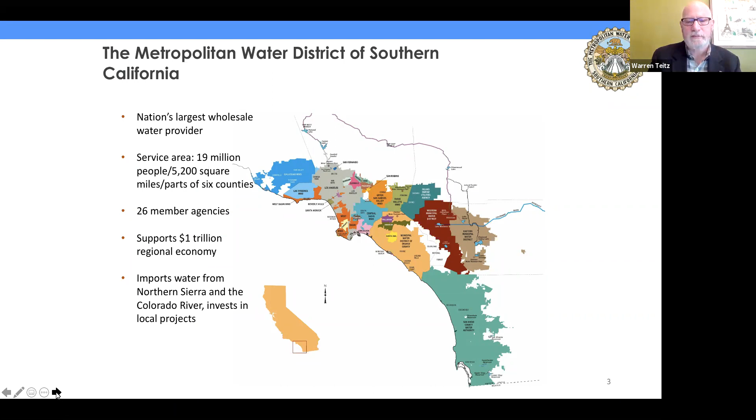So for the past 30 years, we've been diversifying our resource portfolio through investments in conservation, local resources, and storage and exchanges. And we've invested about $1.5 billion in these local supplies. It's part of our One Water approach to building climate resiliency into our reliability in our portfolio. And innovation is a key part of that. That's really the goal of this Future Supply Action Funding Program, to drive innovation with local supplies in partnership with our member agencies.

So we initiated the Future Supply Action Funding Program in our 2010 IRP with the goal of wanting to be able to accelerate these local supplies if we needed them in the future, not just for climate change uncertainty, but for all kinds of uncertainty that our region faces. We wanted to drive innovation and pilot new approaches, and these demonstration studies de-risk new technologies so that we can safely integrate them into our practices. We want to do that by removing technical, institutional, and regulatory barriers.

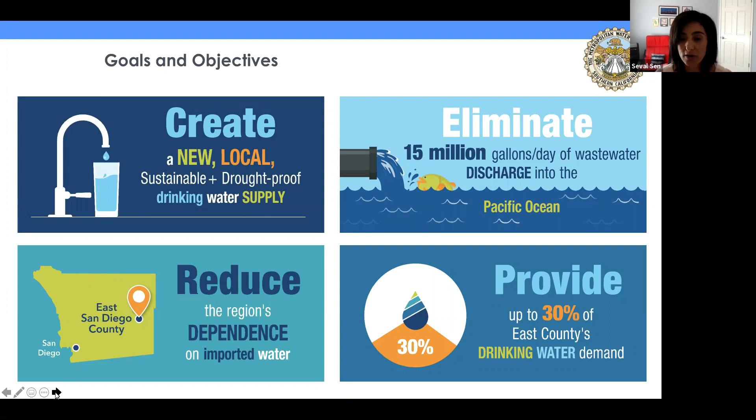A little bit about our goals for the project. Why are we doing this? It's really to create a new local, sustainable, drought-proof drinking water supply in our community. The project size is about 15 million gallons a day of wastewater, eliminating that discharge into the Pacific Ocean, capturing it where it's generated and turning that into a local water supply. It will create up to 30% of our customers' drinking water demand, and in return reduce dependence on imported water. Next slide.

Getting into a little more detail, this is our area in East San Diego County. There's about 15 MGD of wastewater projected to be generated by the online time of this project, and currently we generate about 14 MGD, so we are not far off. But currently we only take 2 MGD of that

wastewater and send it to the Ray Stoyer Water Recycling Facility, owned and operated by Padre Dam, and turn 100% of it to recycled water use, and also supplement and feed the Santee Lakes Recreational Preserve. The remaining flow is discharged to the City of San Diego's collection system and sent to the Pacific Ocean through the Point Loma wastewater treatment plant.

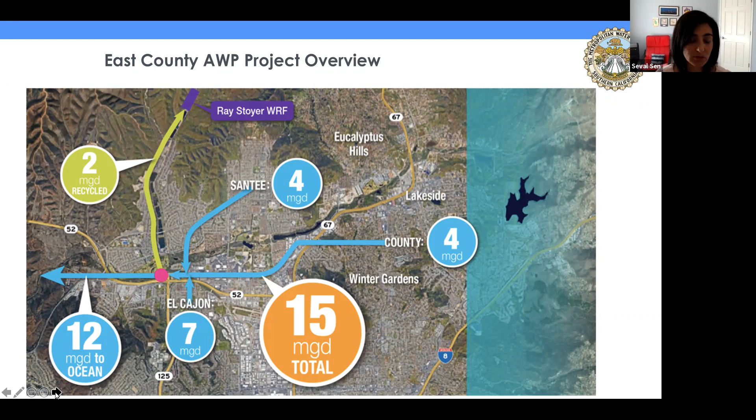Next slide. With the implementation of our project, we are not going to waste that wastewater. We'll capture all of it from all the partnering agencies and direct it to the expanded wastewater treatment plant that we are currently working on, coupled with the advanced water purification facility to produce raw water suitable for discharge into Lake Jennings, the local reservoir, as you can see on this figure. Lake Jennings is owned and operated by Helix Water District, another partner of the project.

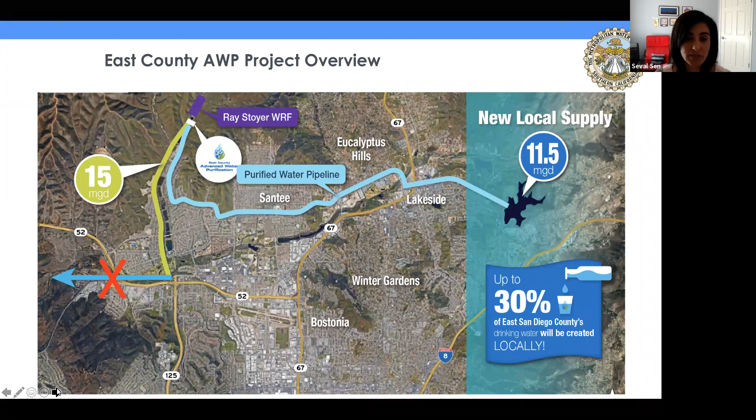This water will once again be treated at their Levy water treatment plant before it's served to the customers. That will generate 30% of our demand, as I said, between the Helix Water District and Padre Dam Municipal Water District service areas. Next slide.

A little bit about the implementation schedule, just to set the stage. This is such a huge project for us, so we broke it into three more manageable packages to address the skill sets of the contractors. Package 1 is everything about treatment: the wastewater treatment plant, a solids handling facility with digesters, and the advanced water purification facility.

Package 2 is the product water pipeline, an 11-mile pipeline taking product water from the wastewater treatment plant to Lake Jennings, and the wastewater conveyance improvements are packaged under package 3. They're being done by different design-builders on board. We are executing this project using a progressive design-build method. We are in the midst of design, going through 60% design right now, and we plan to be online by mid 2025.

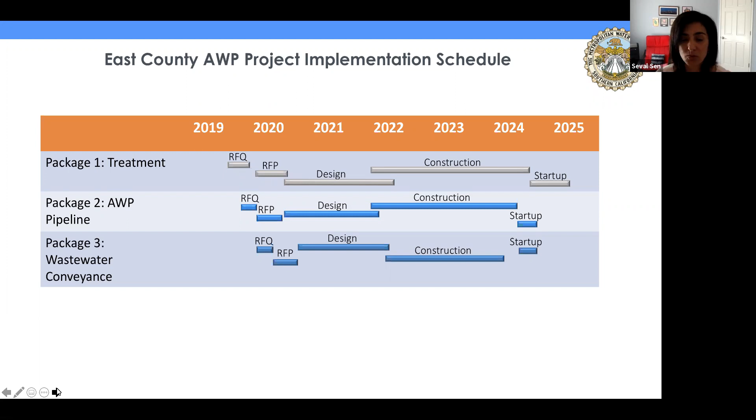And this is where we pilot tested this study as well. And yeah, we also then gained some operator experience on a membrane facility that we never operated before. So Padre Dam operators were taking care of the operation and cleaning everything for this demonstration facility for 6 years. So that was a great benefit.

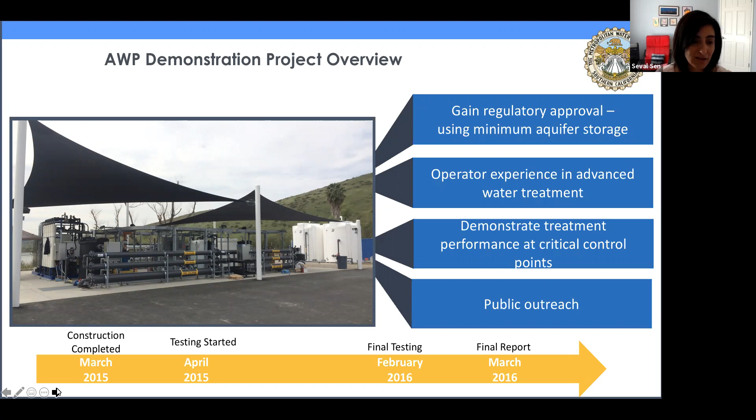And also we used it heavily for public outreach. Hopefully some of you came to the site and visited our demo facility and got one of our tours. So just wanted to mention that and give a visual, because this is where we tested this study. I believe that's my last slide. So I will turn this to Luciana to give us more details about the study that we've done.

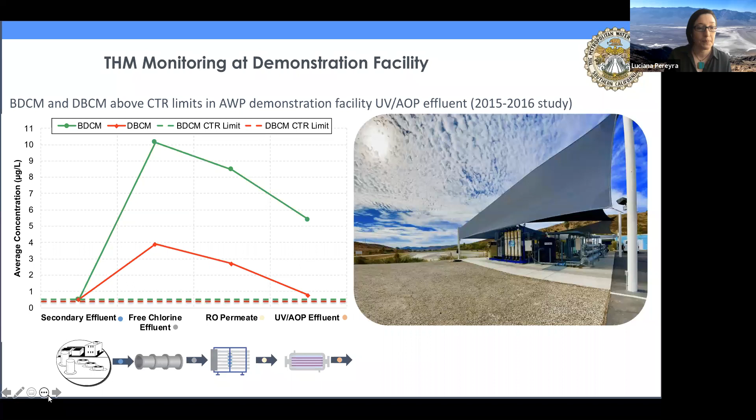So these observations prompted a study, a desktop evaluation of different options to see which one we could use to achieve CTR compliance for these 2 THMs. So these are the 3 options that we looked at. And the first one is the establishment of a mixing zone. So this would be a zone within Lake Jennings, within the reservoir, where the project would receive credit for dilution or for constituent decay, and the CTR limits have to be met within the boundaries of this zone, as opposed to being met in the pipeline right before discharge.

So this is an appealing option because it has no capital or infrastructure investment. But there are several studies that were required for the regulators to consider this option, and it was just not compatible with the timeline of the project, so we didn't select this option.

Another option is the one in the middle, which is air stripping, and this option means that we will separate the THMs because they are volatile, so we can use air stripping towers to do this. This is a proven engineering technology, but it has higher capital and operational costs.

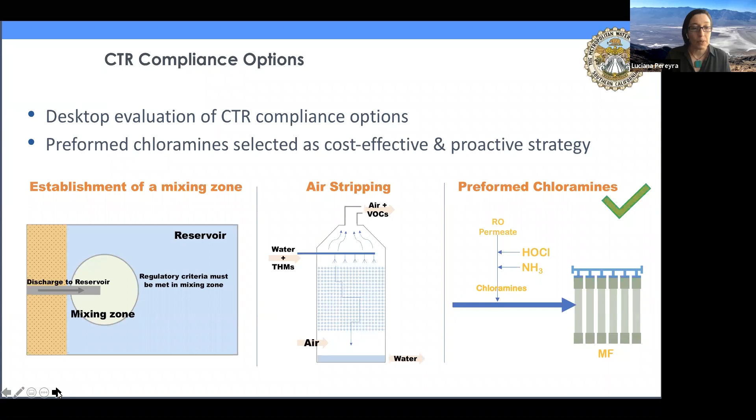So we did not select it. The option that we selected is the one on the right, which is the use of preformed chloramines. And I will tell you more about this because that's the topic of this presentation. But we selected it because it's a cost-effective option and is proactive, meaning that instead of forming these THMs and then finding a technology to remove them, we are implementing a strategy that minimizes or prevents their formation altogether. So I will tell you more about the preformed chloramines.

What we're looking at here is the advanced treatment for the full-scale project. So if we start from the left, and I think, yeah, you can see my pointer. So if we start from the left, we're going to be treating tertiary treated wastewater, and it's going to be treated by membrane filtration, reverse osmosis, ultraviolet advanced oxidation process, or UVAOP. And then this product water is going to be transported to Lake Jennings. And during that transport, we're going to do a free chlorine disinfection.

So if you look at this treatment train, you can see that at different points in the treatment, we add chlorine or HOCl. So if we start at the end of the treatment, we use it for disinfection. In UVAOP, we use it as an oxidant. And here at the front of the treatment, we add it together with ammonia, and that is to form chloramines. And chloramination of the feedwater is a common practice when we have membrane processes, because the goal is to prevent biological growth and biofouling of the membrane processes.

So we could do this, for example, with free chlorine. We're going to prevent biological growth, but free chlorine is a very strong oxidant, so it's going to damage the membranes. So instead of doing that, we form chloramines that are mild oxidants, so they are not as damaging to the membranes, and they can still prevent biological growth. So this form of addition of chlorine and ammonia directly into the feed water is what we call inline chloramination or conventional chloramination, and that's what we did during the demonstration study.

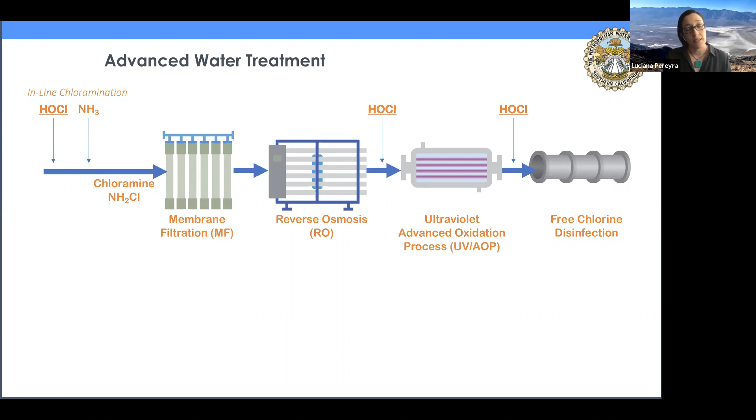So if we could zoom in this part of the process and see what happens with the chemistry, we would see something like this figure in the bottom left. So we have the tertiary treated effluent coming in, and this has some organic and inorganic constituents, and some of them are DBP precursors. So for example, inorganic DBP precursors are bromide, that is involved in the formation of all the brominated THMs and also bromamines. So what happens when we add chlorine, which is a strong oxidant, to this water, is that reactions are going to take place and DBPs will be formed. For example, the 4 THMs that I mentioned before.

We're also adding ammonia to form the chloramines. So we effectively form the chloramines, but with the ammonia now we can form bromamines too, and those could damage the membranes. And once we have chloramines in the water, there are reactions that can take place with chloramines too, and the constituents in the source water, and that could lead to the formation, for example, of NDMA. And NDMA is another chemical that's regulated under CTR. It's a CTR constituent, and it also has a notification level for drinking water. So the idea of using preformed chloramines is that we will prevent these reactions from happening.

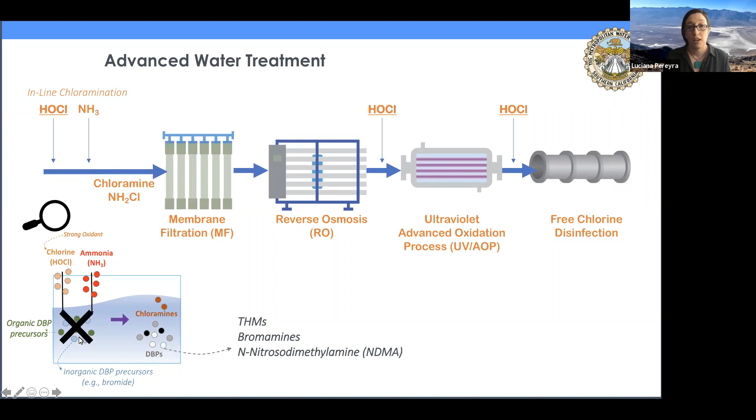And the way to do that is with a simple change in the process, which is shown in this figure on the right. So instead of adding chlorine and ammonia directly to the feed water, which is this thick arrow, we add it to a side stream of water that's very clean. It has very low content of organics and inorganics. So when we mix them, we only form the chloramines and avoid all these other undesired reactions. And one type of clean water that we can use is RO permeate. So this has low capital and O&M costs. There is some additional equipment that's required compared to inline chloramination, but it's minimal.

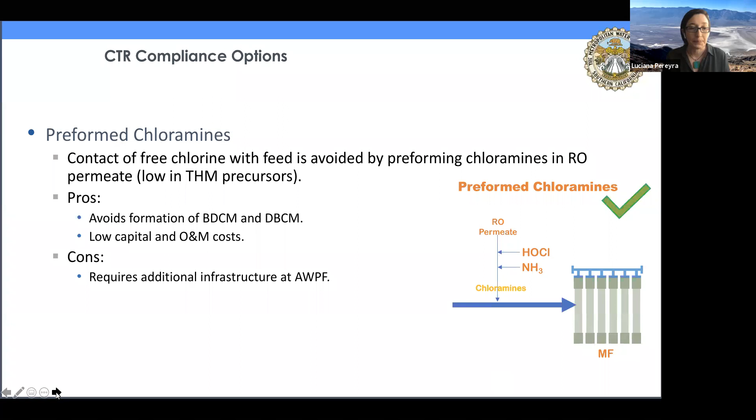These are some examples of the use of preformed chloramines in full and pilot scale projects. The inline chloramination or conventional chloramination is the common practice in drinking water and also in groundwater recharge. But the use of preformed chloramines is gaining traction here in the US and for potable reuse. So we have some examples at pilot scale. For example, the West Basin desalination demonstration that used preformed chloramines to reduce bromamine formation.

DC Tillman looked at preformed chloramines to control NDMA formation. And the Pure Water San Diego Phase 1 project, which is another surface water augmentation project in the region, is looking at preformed chloramines to control bromamines. And at full scale, there's a plant in Perth, Australia, that uses preformed chloramines for DBP control, and also the NEWater facilities in Singapore.

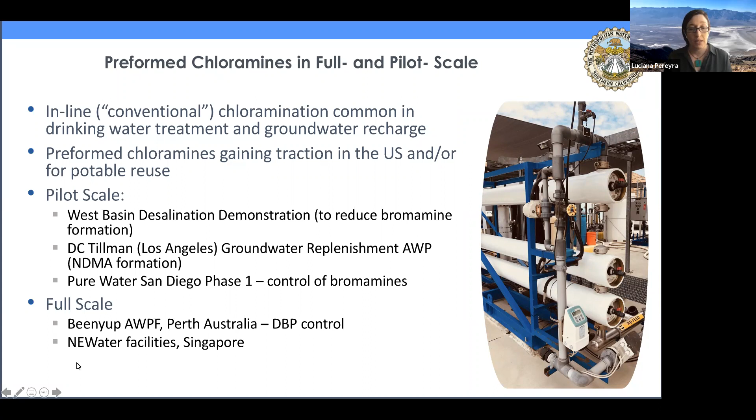So going back to our demonstration facility and our own study, we installed a preformed chloramine system at the demonstration facility and monitored the performance and the water quality for 12 months. And this was to see if using this strategy of preformed chloramines could help us achieve levels of THMs in the product water that were compliant with the CTR requirements.

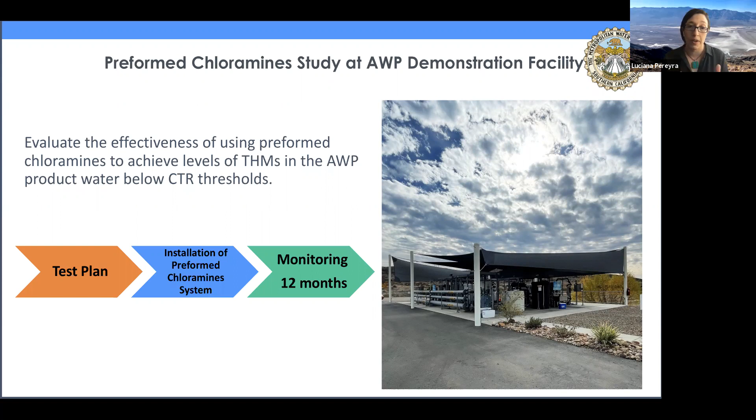This is the test plan that we developed. The treatment train that you see here is what we're using at the demonstration facility. So we have secondary effluent coming in, and it's treated with membrane filtration, reverse osmosis, and UV AOP. And we sample along the treatment in the feed, in the RO feed, RO permeate, and the product water, which is the UV effluent. So at these 4 locations, we sample for NDMA and for the 4 THMs.

In the feed water, we also measure bromide because, as I said before, bromide is involved in the formation of bromamines and in the brominated THMs. So it's important to know what's the concentration of bromide coming into the treatment. And you can see too that in the RO feed, permeate, and the UV effluent, we measure DEHP, which is di-2-ethylhexyl phthalate.

And this is not a disinfection byproduct, and it's not related to whether we use inline or preformed chloramines. It is regulated under CTR, and it's a chemical that's used in the plastic industry to make plastics more flexible. And there was an interest in this project to gather more data about this compound. So this study presented a good opportunity to do it. So that's why we added it to the test plan.

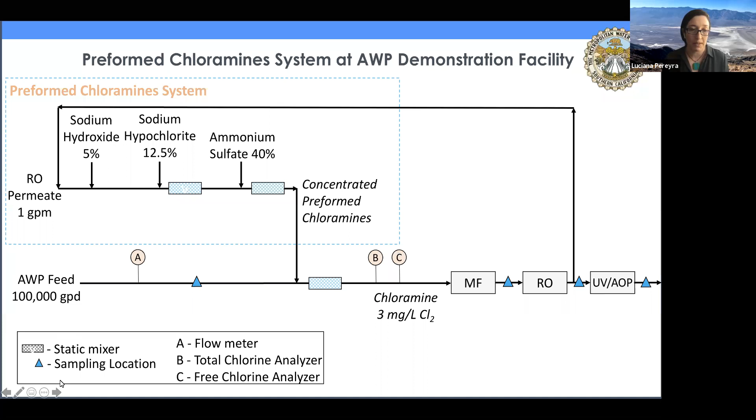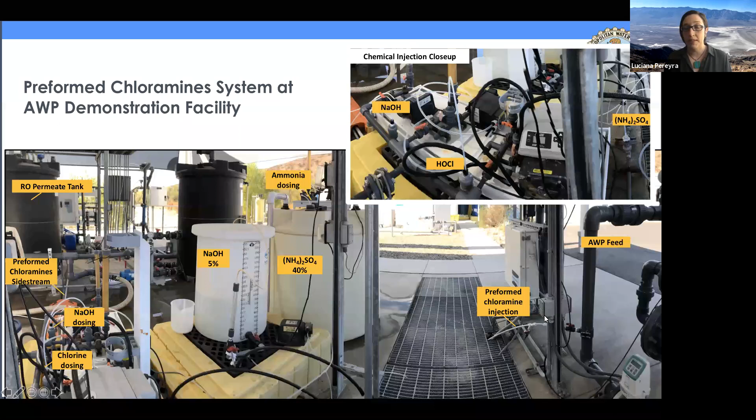Okay, so now moving on to the results, I want to show you first the performance in terms of achieving our target dose, and that worked really well. So as I said before, we were targeting a residual of 3 milligrams per liter after chloramine injection, and we measured that with our total chlorine analyzer, and those are the blue circles in the figure. So you can see we were always around 3 milligrams per liter.

Then as the process continues, we lose some of that residual, which is normal, and those are the green triangles. And also we measure free chlorine, which is the red squares, and you can see we didn't send any to the membranes, which is good.

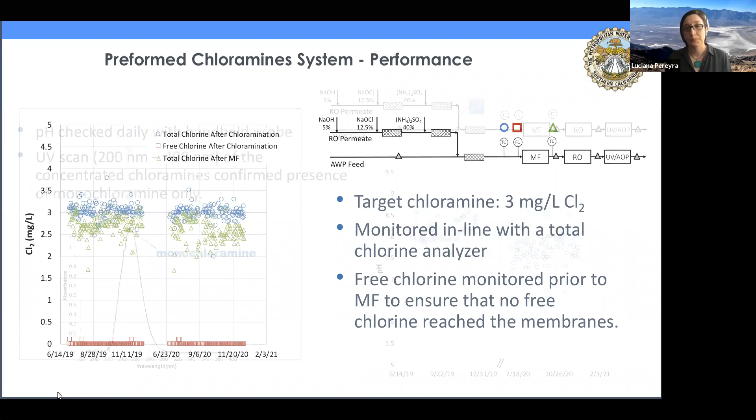Another important part is that you want to make sure that the pH in this side stream where you preform the chloramines is 7 or higher, maybe 8. So we monitor that. We were able to be always around 8, and the objective of that is to make sure that we are forming monochloramine instead of dichloramine. So we took a sample of the concentrated chloramines and ran a UV scan and confirmed that we indeed were forming only monochloramine. We had one peak corresponding to monochloramine.

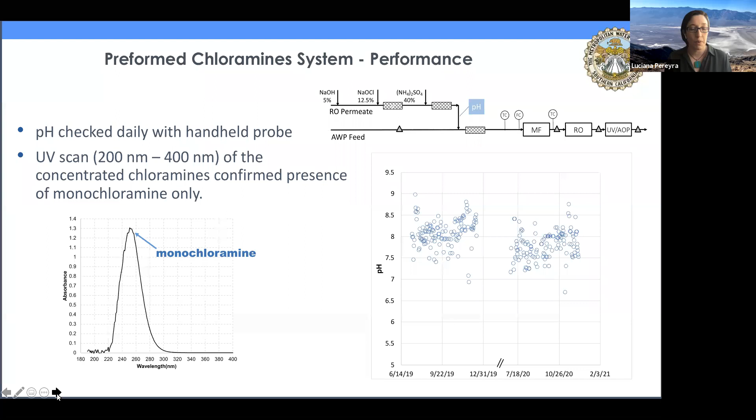So now moving on to the more interesting part, which is the water quality results. This is the bromide concentration in the feed water. So we measure bromide before injecting the chloramines, and we want to know the concentration of bromide because it's involved in the formation of DBPs. It was between 190 and 300 micrograms per liter, which is not considered a high concentration when you compare, for example, with seawater or with water that is affected by seawater intrusion. And we know that reverse osmosis provides very good rejection of bromide, so it's going to be very low in the RO permeate, comparable to other US water sources.

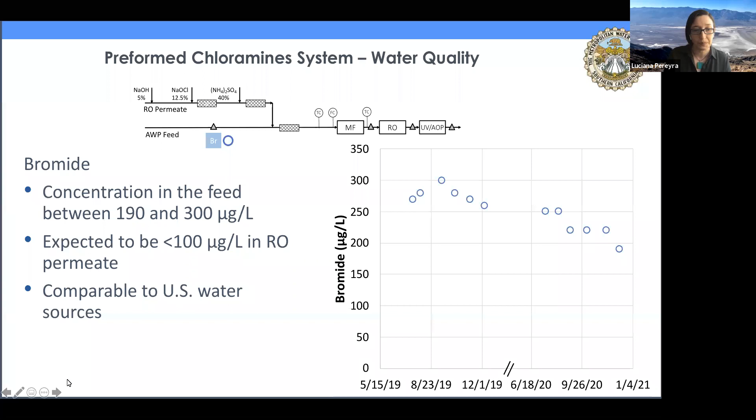Okay, so these are the results for the THMs, and this was very encouraging. You can see in this table on the left, we have the 4 THMs that we monitored: BDCM, DBCM, bromoform, and chloroform. And here are the results for different points of the treatment. So we measure them in the feed water before injecting the chloramines, and you can see they are all below 0.5 micrograms per liter. So we didn't detect them. And I don't know if I mentioned this before, but we monitored over 12 months, every week and sometimes twice a week. So we have a pretty complete data set.

So then we inject the preformed chloramines. At this point, when we did the study in 2015 and 2016, we were doing inline chloramination, and this is where we saw that increase in the THMs. But now we measure after injection in the RO feed, and BDCM, DBCM, and bromoform are still below 0.5 micrograms per liter. We did have some formation of chloroform, but it's looking much better than what we saw before. In the RO permeate, the 4 of them were on average not detected. And in the UV AOP effluent, all of them were consistently below 0.5 micrograms per liter. So this was very encouraging. This is telling us that adding the chlorine and ammonia in this way is helping us prevent or minimize the formation of DBPs, and we are achieving a product water that's CTR compliant.

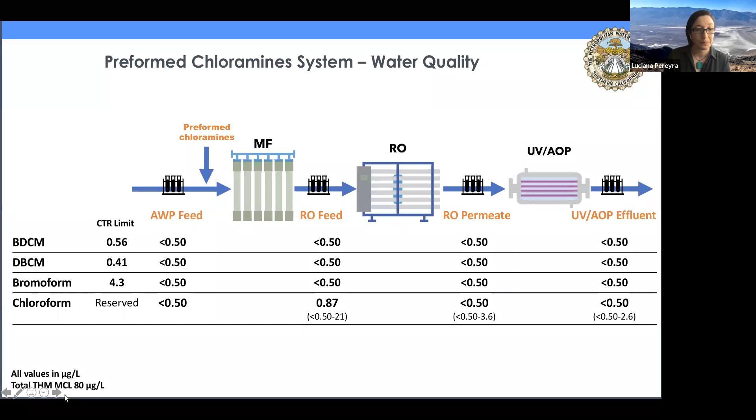So we also monitor NDMA. As I mentioned before, NDMA can be formed when chloramines react with nitrogenous organics in the feed water. So it's a disinfection byproduct, but it's also a product of some industrial processes. So we could have it in the source water, and that was indeed what we saw here. The blue solid dots are the NDMA concentration in the feed water, and you can see that we detected it at varying concentrations. Then we add the preformed chloramines, and we measure again in the MF, in the RO feed with the red squares, and concentrations seem to increase slightly, indicating that maybe we formed some NDMA.

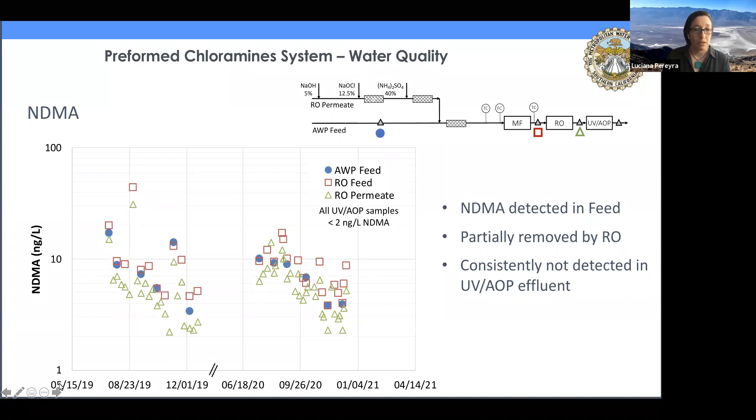We measure again in the RO permeate, and that's the green triangles, and the concentration decreased. So we are removing it through RO, but it's partial removal, which is consistent with what we've seen before. We know that the main mechanism of removal of NDMA is through photolysis in the UV treatment. And that's exactly what we saw here. We don't have symbols for the UV effluent because all of them were below detection. So we were efficiently removing NDMA in this treatment. So that's good news too.

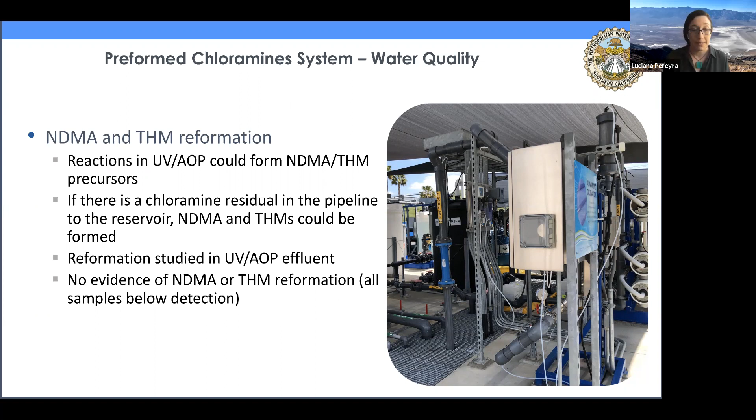One thing that we looked at was the potential for NDMA reformation. That's because some studies have reported that during UV treatment, when all these compounds are being broken down, some of them could become NDMA precursors. And then in the transport to the reservoir, if there's still chloramine in there, we could have NDMA reformation. So we wanted to investigate this, and for that we collected samples of the UV AOP effluent and tried to simulate the time that the water would be transported to the reservoir, and then measured again. And we did the same for THMs, and both were still below detection. So we didn't have any indication that reformation was happening. So that's also good news.

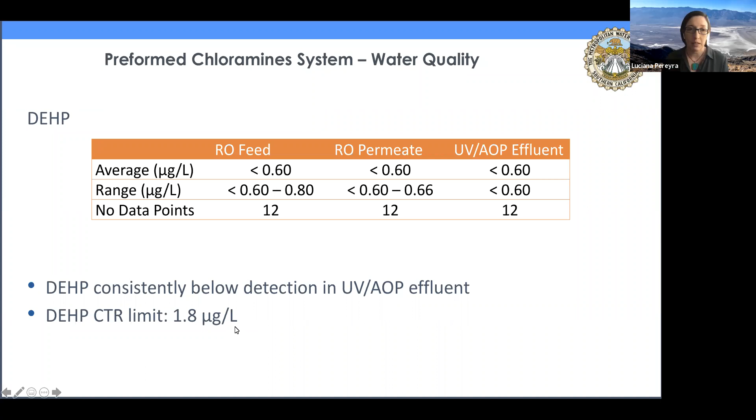Excuse me. Okay, so this is the last of the results, and that's for DEHP. As I mentioned before, this is regulated by CTR, and we wanted to gather more data. We detected it sporadically in the RO feed and permeate, but it was consistently not detected in the UV AOP effluent. Our method reporting limit was 0.6, so less than 0.6 micrograms per liter, and that's well below the 1.8 micrograms per liter CTR limit. So those results look good too.

So to conclude, we demonstrated with this study that preforming the chloramines in RO permeate helps maintain DBP levels that are below the CTR thresholds. BDCM and DBCM, which were the most concerning THMs, were always below detection in the UV AOP effluent. NDMA was below detection too. We did see some formation, but it was partially removed in RO treatment and then very well removed during UV

treatment. So with this study, we demonstrated that preformed chloramines are a cost-effective way of achieving CTR compliance for DBPs, and we hope that this will make implementing preformed chloramines for surface water augmentation more attainable in California.